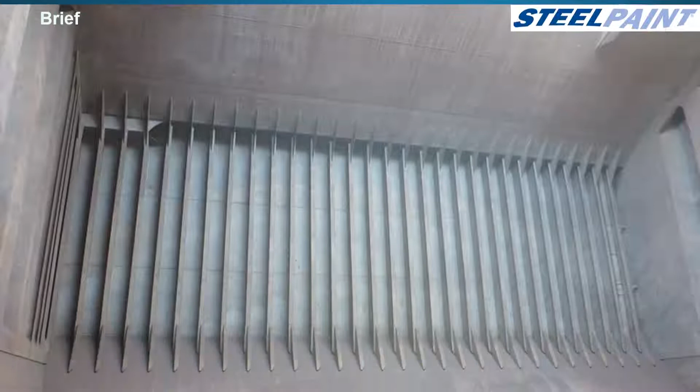In 2008, SteelPaint was invited to participate in a full-scale test on board of Sophie Oldendorff, a Panamax bulk carrier owned by Oldendorff Carriers. The purpose of the test was to find the most suitable coating system for the cargo holds. A different coating system was applied in each hold. SteelPaint was appointed hold number 3, which is also used as a ballast hold and therefore the biggest challenge.

The system applied was 2 times 100 microns of PU zinc. The other holds were all coated with glass flake reinforced epoxy coatings at DFTs averaging from 600 to 1200 microns. After 6 months, all holds were evaluated. Hold number 3 was the only one in excellent condition. All others showed the usual signs of breakdown.

During the next dry docking, after 2.5 years, hold number 3 only had some minor spot damages, 5%. All other holds had to be fully staged and blasted again, 50 to 75%. They were all repainted with SteelPaint's PU zinc. Since then, Oldendorff has gradually changed the coating system in the cargo holds of their own fleet to the PU zinc.

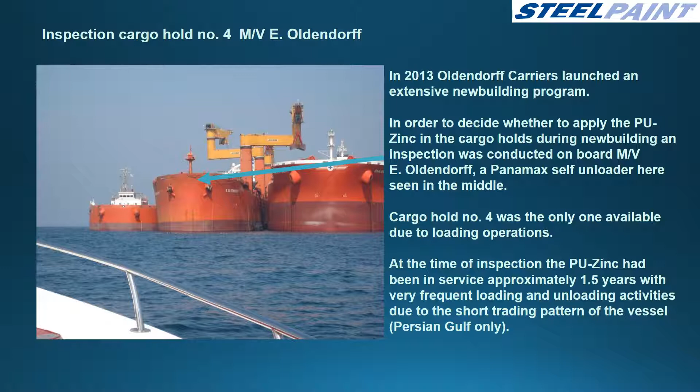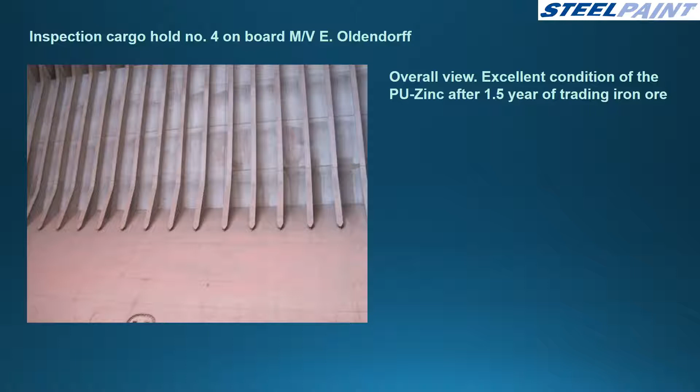At the time of the inspection, the PU zinc had been in service approximately 1.5 years with frequent loading and unloading activities due to the short trading pattern of the vessel, Persian Gulf only. This is an overall view. Excellent condition of the PU zinc after 1.5 years of trading iron ore. Here you see a cross test showing excellent adhesion of the PU zinc.

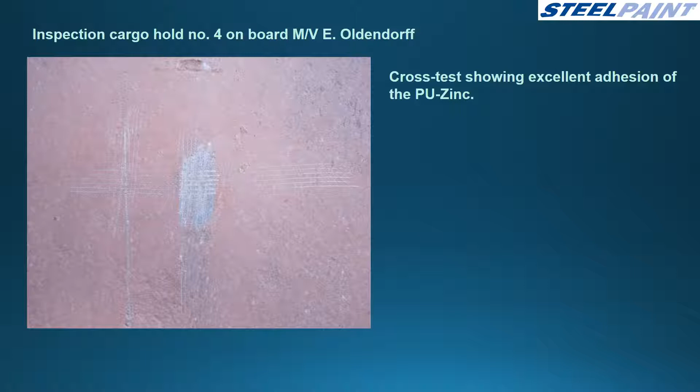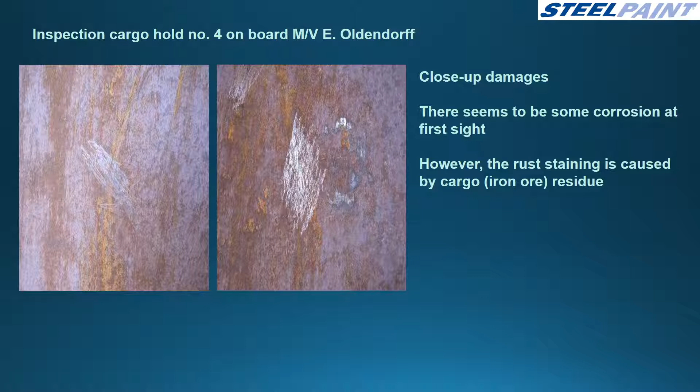A close-up view of some damages. There seems to be some corrosion at first sight. However, the rust staining is caused by cargo iron ore residue. It is merely superficial. When removed by scraping or wire brushing, the metallic action of the zinc becomes visible immediately.

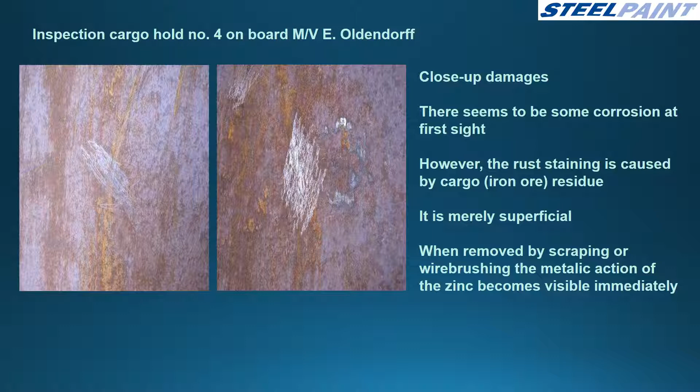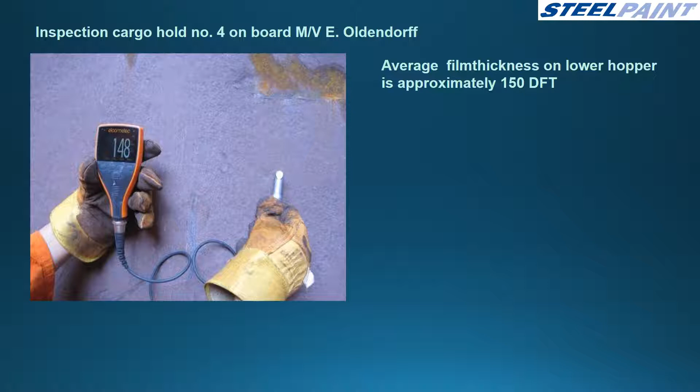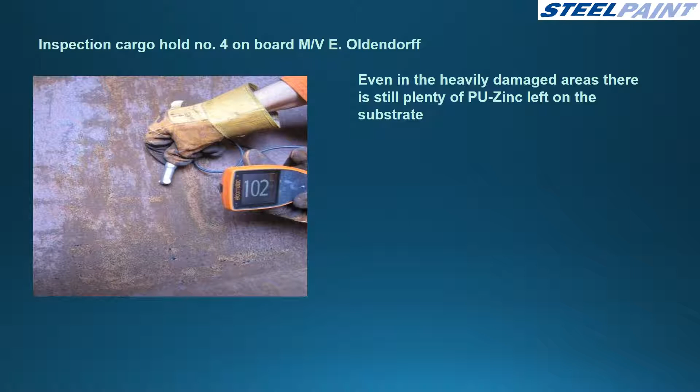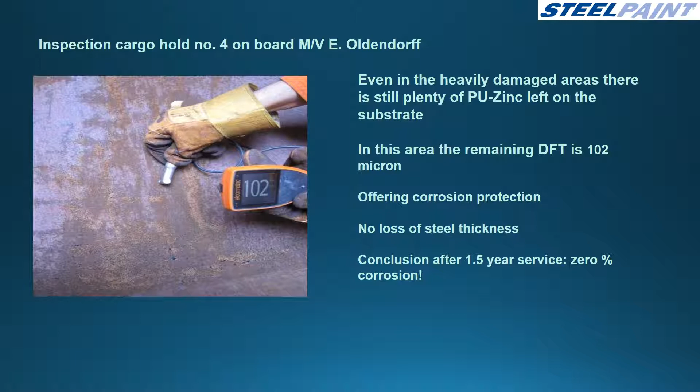The average film thickness on the lower hopper is approximately 150 microns. Even in the heavily damaged areas, there is still plenty of PU zinc left on the substrate. In this area, the remaining dry film thickness is 102 microns, offering corrosion protection. No loss of steel thickness. The conclusion is that after 1.5 years service, there is 0% corrosion.

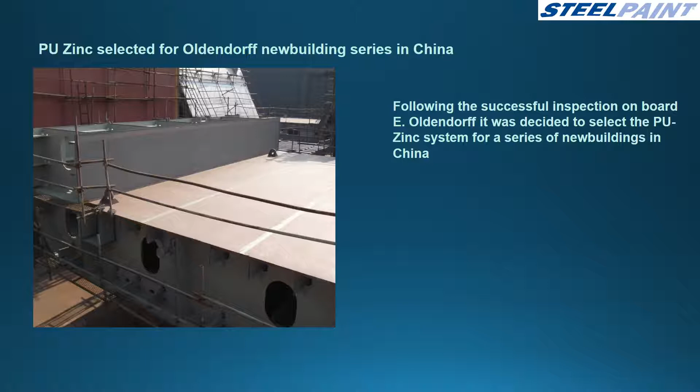Following the successful inspection on board E. Oldendorff, it was decided to select the PU zinc system for a series of new buildings in China: nine 39,000 deadweight bulkers at Nanjing Jinling, two 94,000 deadweight bulkers at New Yangzijiang. Coating system 2 times 100 microns of PU zinc, for the sides, upper and lower hoppers in all cargo holds.

At the same time, we started a test program on board VLOC Berge Bureya of Berge Bulk. The purpose of this test was to see if the PU zinc would hold up to the impact and abrasion of the cargo, grab and bulldozer, not only on the lower hopper and sides, but also on the tank tops. The total area of the test is about 100 square meters in the center and partly on the lower hopper, in hold number 6. The surface preparation was slurry blasting, SA2, according to NACE number 7.

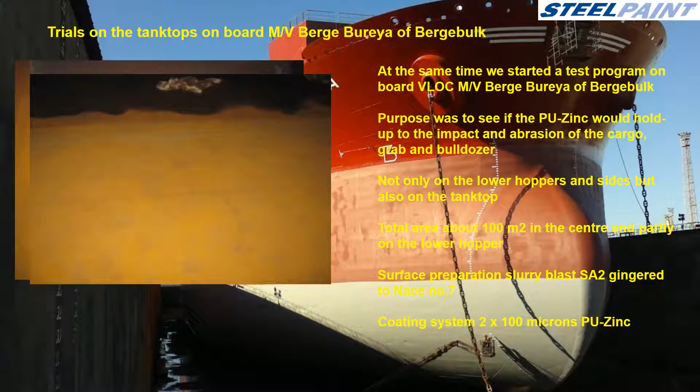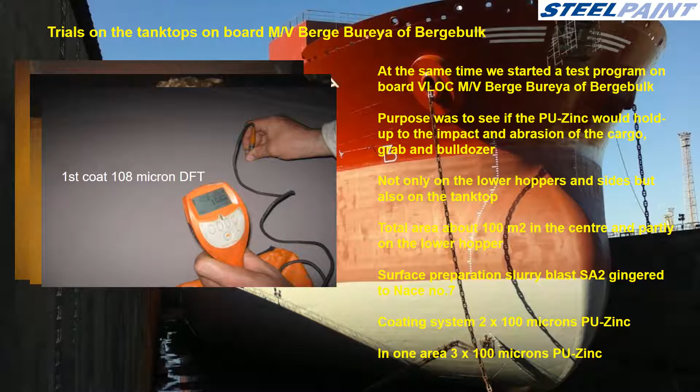Coating system 2 times 100 microns PU zinc. In one area we tried 3 times 100 microns of zinc to see if there would be any difference. This is the first coat of PU zinc reddish gray at a film thickness of 108 microns. Application of the second coat, PU zinc gray.

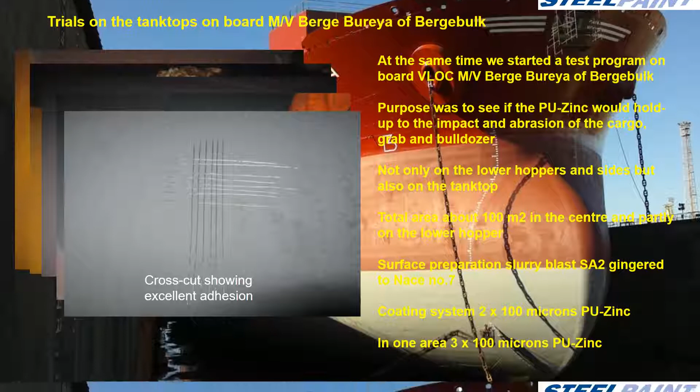Here we see a cross-cut showing excellent adhesion between the PU zinc and the substrate and itself. The results after the first and second cargo round trip looked very promising. We were seeing that even in the heaviest damages there was still enough zinc left to offer protection. There were only very few areas where the PU zinc was totally gone. Around these spots, the zinc will offer cathodic protection to prevent corrosion.

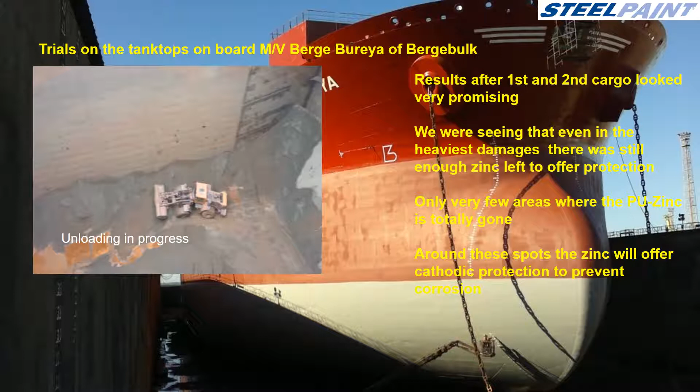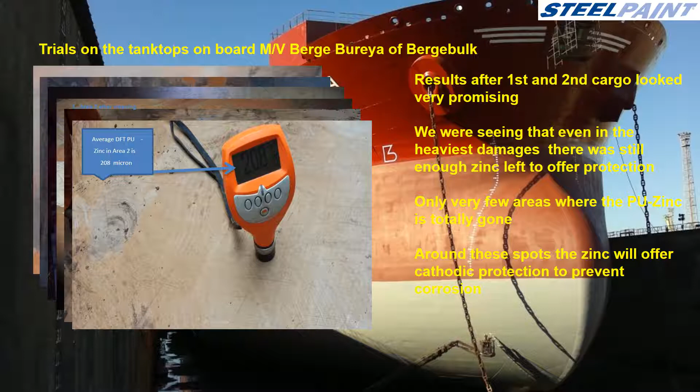Even in the damaged areas we can still find zinc. Here we see that there are still 20 microns of zinc left on the substrate. Here we see that the dry film thickness is 169 microns, and after scraping with a coin you can see the metallic action of the zinc quite clearly.

After the promising results of the test on board Berge Bureya, it was decided to do a full Cape-size vessel. This was on board Berge Matterhorn, a 170,000 ton deadweight Cape-size bulker owned by Berge Bulk, during a dry docking in Shenzhen Youlian Shipyard in China, April 2014.

The tank top after high pressure fresh water washing. Surface preparation, grit blasting SA2. On the lower hopper, the old epoxy coatings were not completely removed. Application of the single pack Moisture Cured Polyurethane Zinc reddish gray at 100 microns. Application of the second coat PU zinc gray.

Here we see the final result. The total DFT is between 208 and 250 microns. After 9 months service, the results were checked in Taichung, Taiwan. Unloading in progress.

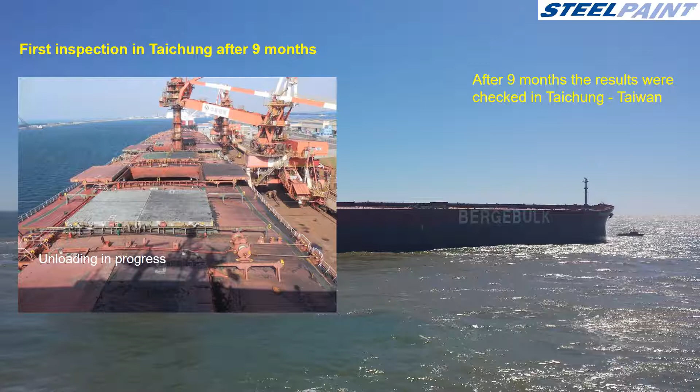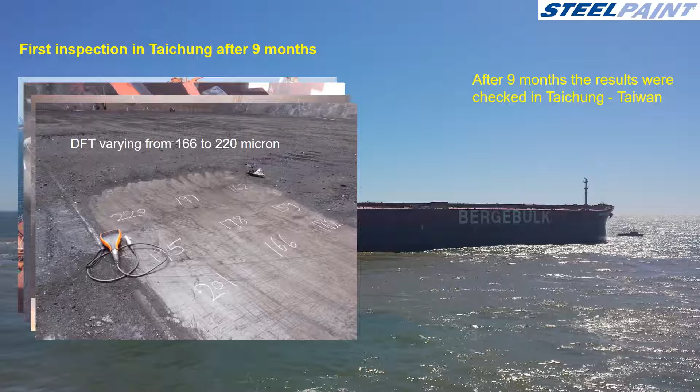This is an overview of hold number 5. No corrosion. DFT varying from 166 to 220 microns. A close-up of a new bottom plate. Close-up of an old plate with heavy pitting.

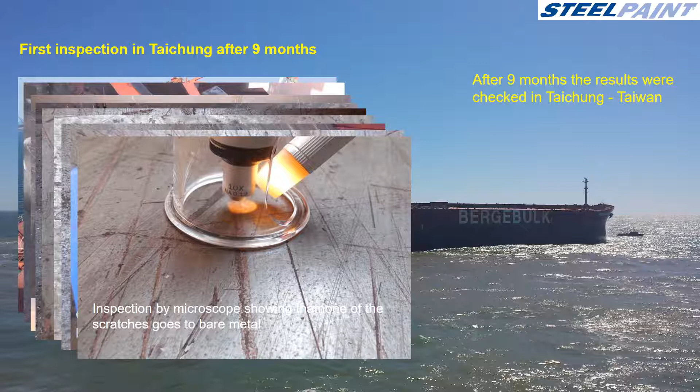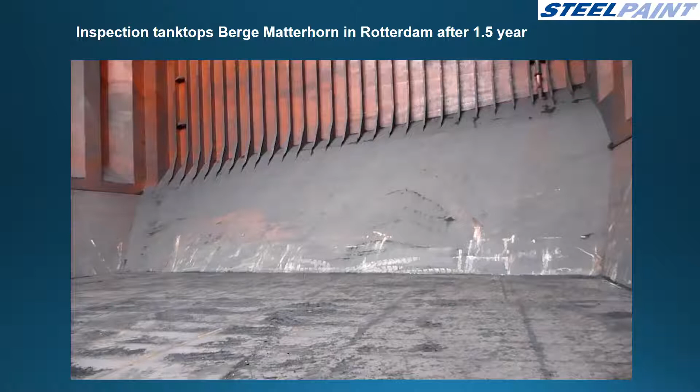This is a close-up of the lower hopper showing very few damages. A cross-cut test showing that the adhesion is still excellent. Inspection by microscope showing that not one of these scratches goes to bare metal. The following videos were taken during an inspection in Rotterdam after 1.5 year service life of the PU zinc.

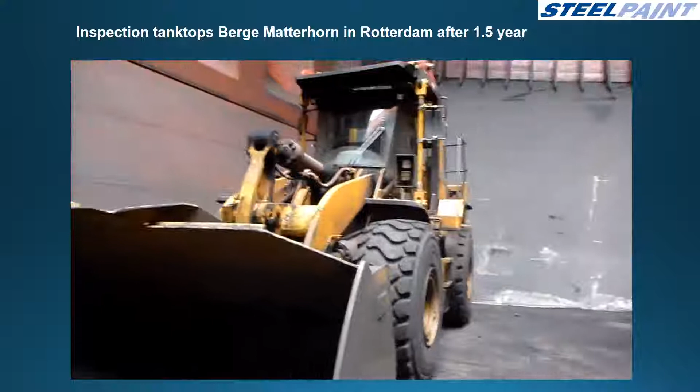Okay, we're now in hold number 8. Number 8 has not been repaired by the crew yet, and we're going to locate the areas which need attention. Here you can see the bulldozer, which is scraping over the bottom, and it will hit the areas that are sticking out higher than the rest of the areas most.

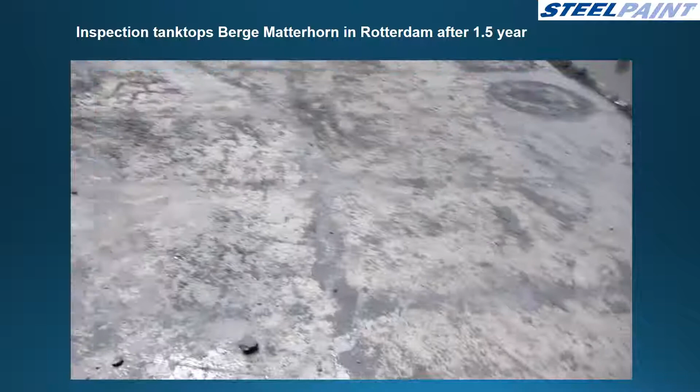For example, you can see this, the grab here, you can see here this area following, and this is exactly on top of one of the frames in the double bottom. So basically we can say that all the frames here of the double bottom structure need some attention.

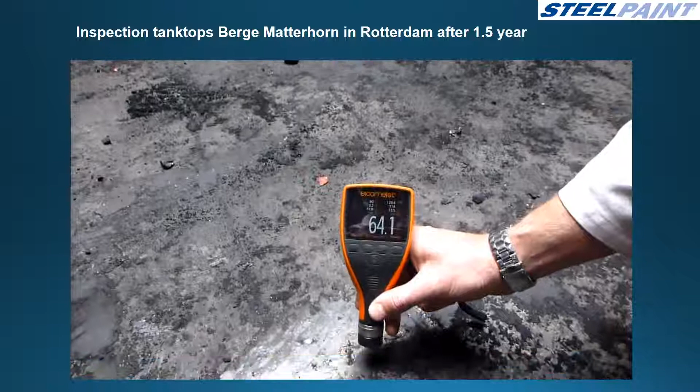You can see there's no corrosion in most places because in a lot of the areas there's still zinc. Even here where the bulldozer hit it pretty bad, there's still 154, 246, 175, and obviously there are some small areas where the thickness will be very low, but because the surrounding zinc is offering cathodic protection, these areas are not corroded yet.